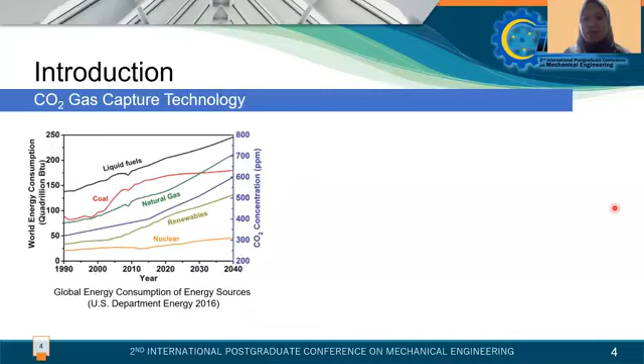So why do we do this topic? Because as we all know, today world energy consumption has increased each year. And based on the US Department of Energy in 2016, the major energy sources still come from fossil fuel. So it has an impact on the increase of the CO2 concentration in the atmosphere.

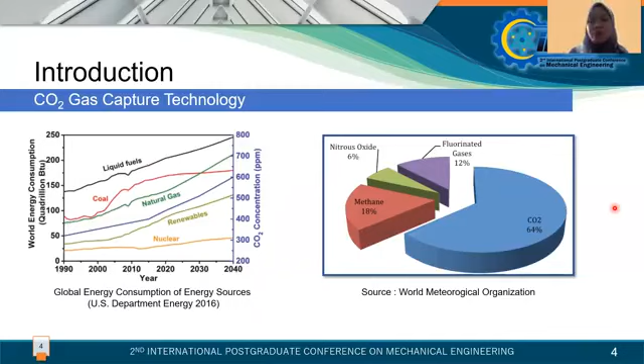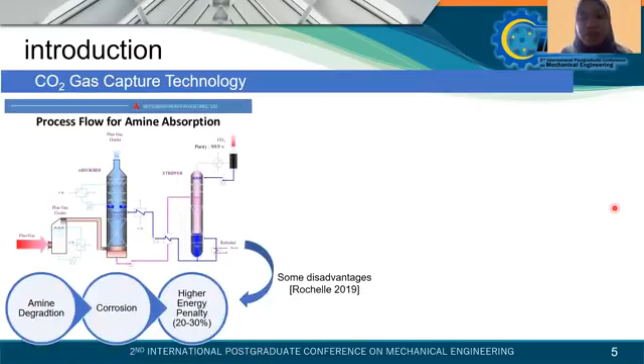And also CO2 and methane are still the biggest contributors to global warming, so we need technology to reduce or capture the CO2 molecule, because renewable energy is considered a long-term plan. Right now, in industry, in power plants and also the cement industry, they use amine absorption to capture CO2. However, this technology has some disadvantages: amine degradation, corrosion, and also a higher energy penalty up to 30%.

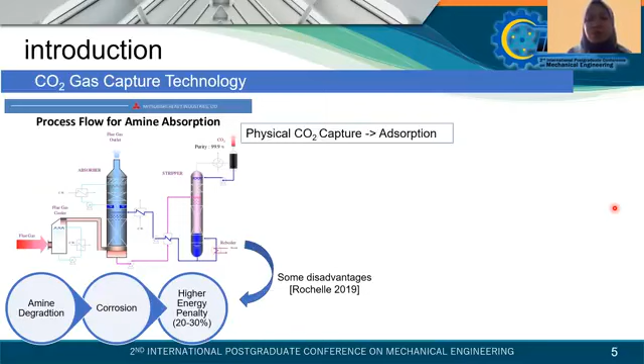So we need another method to capture CO2 with a low energy penalty, and it is called CO2 capture by adsorption. Adsorption is believed to be a viable solution because it has low operational cost, and it doesn't have a high energy penalty. It is divided into two types, PSA and TSA, or temperature swing adsorption.

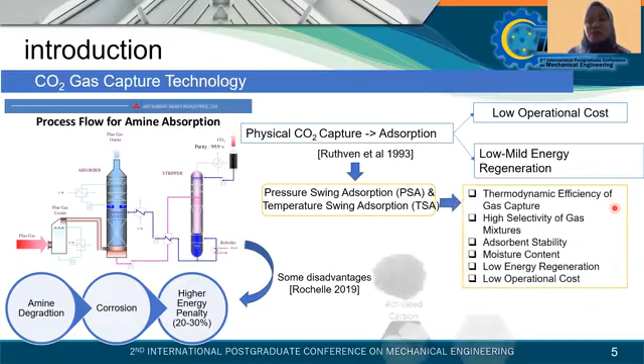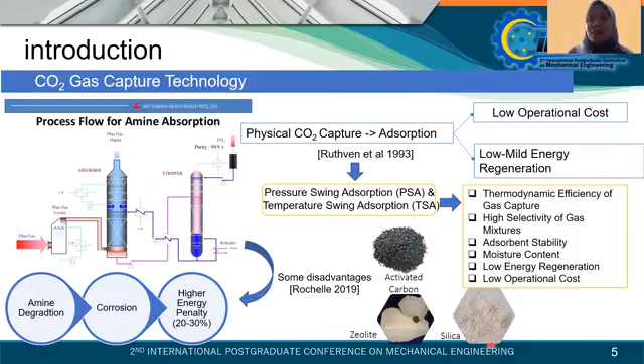The adsorbent should have certain characteristics so that it can capture the CO2 molecule efficiently. Here are the characteristics. And some adsorbents have been widely used in industry, like activated carbon, zeolite, silica gel, aluminum oxide, metal oxide, and also metal organic frameworks.

In the past 2 decades, the new adsorbent called metal organic frameworks, or MOF, is believed to be a viable solution for CO2 adsorption because it has many advantages. They have high porosity and surface area, the pore size is very easily customized, it has good crystallinity, and it has high thermal stability and also chemical stability.

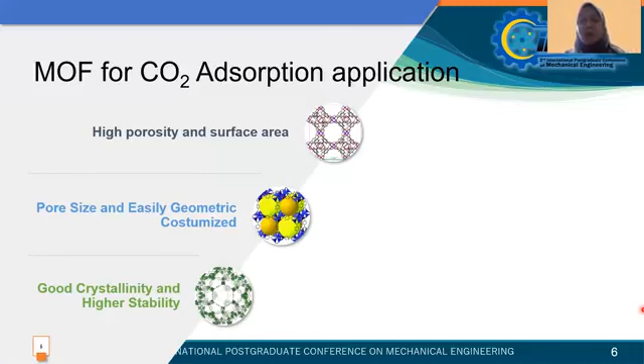Well, MIL-101 is one of the most widely researched today because it has very good thermal stability. It can be heated for 7 days at 100 degrees Celsius. And this kind of MOF has been proven to capture CO2 efficiently. MIL-101 consists of chromium as the metal and terephthalic acid, or 1,4-benzene dicarboxylic acid, as the ligand.

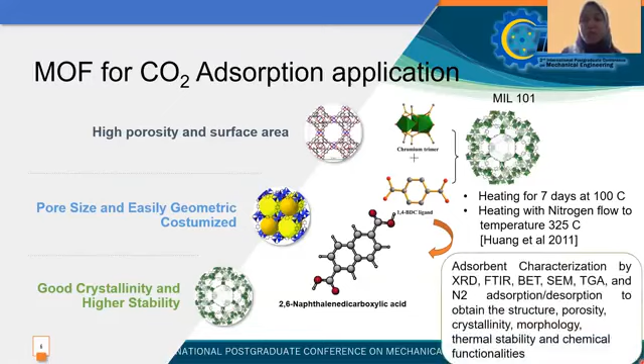Because MOF geometry is very easily customized, we would like to utilize this advantage by changing the ligand. We do ligand functionalization by changing the 1,4-BDC ligand to the 2,6-NDC ligand. As you can see the difference between these ligands, with the double benzene ring, we hope that more CO2 molecules will be captured, because the new MOF, MIL-101 NDC, has high surface area and pore volume. After the synthesis of MIL-101 NDC, we do adsorbent characterization by several techniques.

And here is our methodology. After we prepare the tools and materials, we do the synthesis of MOF. This is the hardest part because we have to investigate the best reaction temperature, reaction time, the best solvent, and also the best molar ratio.

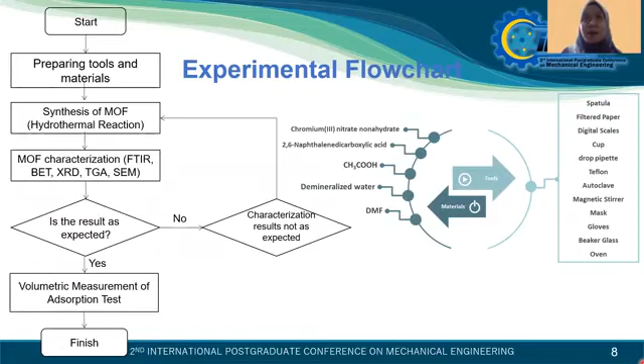And here are the steps of our synthesis procedure. After we stir the mixture using a magnetic stirrer, we put it into the Teflon, and after that we do a heating process in the oven, and we do centrifugation to separate the solid and liquid.

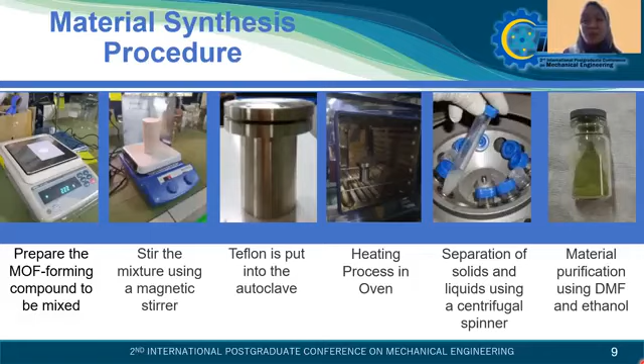And after that, this is the hardest part too. It is called the material purification. We do the second step purification by using DMF and ethanol to remove the unreacted substances in the pore of the MIL-101 NDC. So here is the adsorbent characterization, because each MOF has a different characterization technique.

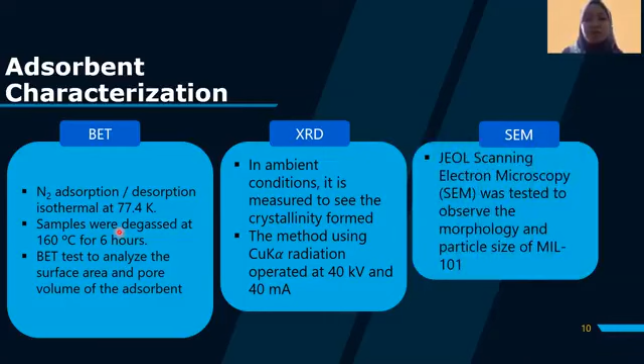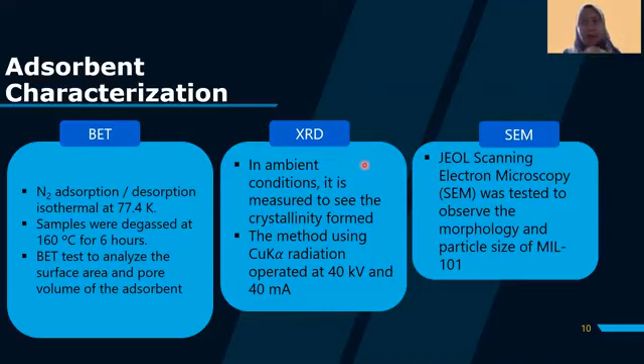So with MIL-101 NDC, to measure the BET, we have to degas at about 160 degrees Celsius for 6 hours to analyze the surface area and the pore volume. And we also observe the XRD and also SEM, and also we want to observe the thermal stability of the MIL-101 NDC, and after that we observe the chemical functionalities of the MOF. And here are the results of our research.

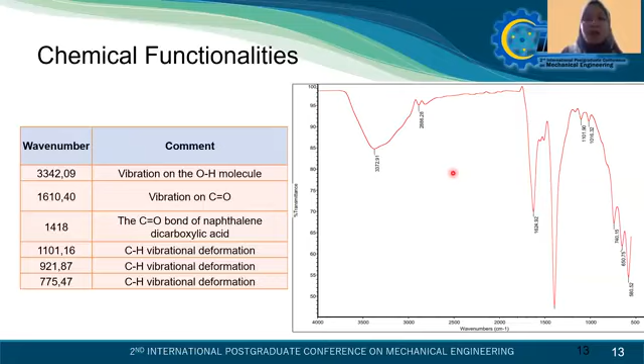And next, here are the results of the FTIR to observe the chemical functionalities. Here we want to observe, is it correct that our MOF contains the naphthalene dicarboxylic acid? As you can see, here are the wave numbers that prove that this MOF has been successfully synthesized.

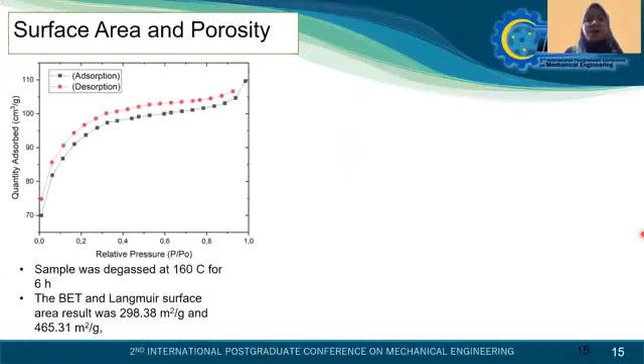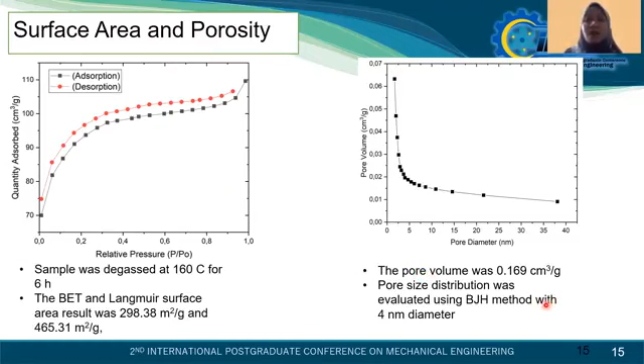And after that, we want to observe the surface area and the porosity, and the surface areas that we got from the BET and Langmuir are 298 square meters per gram and 465 square meters per gram. And also we do the pore size distribution by using the BJH method, and it gets a 4 nanometer diameter for the MIL-101 NDC.

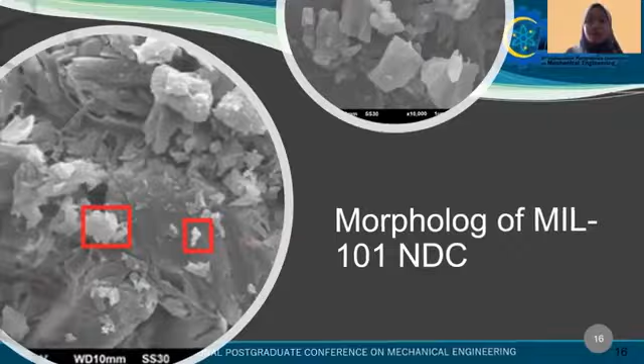And after that, we want to observe the morphology of MIL-101 NDC. As you can see, here is the morphology of our MOF. You can see there is a fractured site in the pore of the MOF. So it means that there are still unreacted substances in the pore of the MOF. So the purification step of our MOF should be increased because there are still unreacted substances contained in the pore of the MOF.

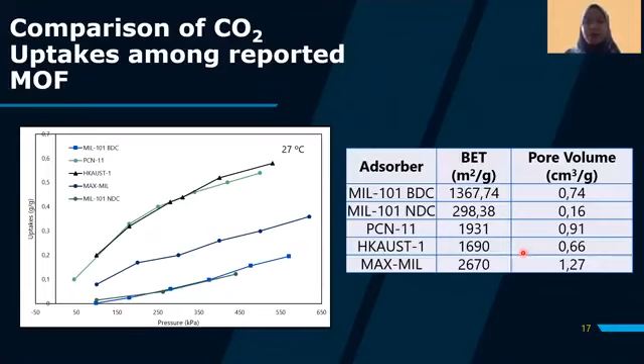So after that, we do the investigation of the CO2 adsorption. We do the comparison among other reported MOFs like MIL-101 BDC, PCN-11, and also MAX-MIL and HKUST-1. And here is our MOF, MIL-101 NDC. As you can see, the CO2 uptake of MIL-101 NDC is still less than the parent MIL-101 BDC. So that's why we need to optimize the synthesis reaction to get a better surface area and a better pore volume to get a higher CO2 capture.

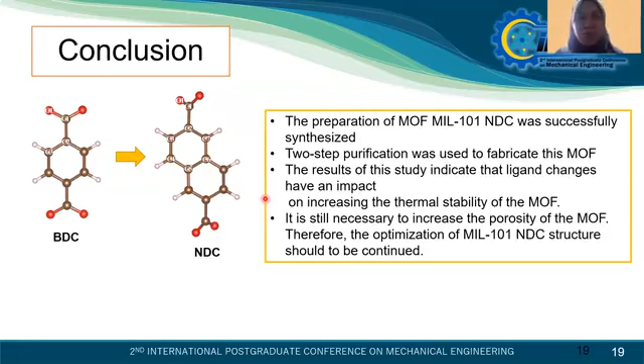But it still needs to increase the porosity of the MOF because the pore volume and also the surface area are still less than the parent. So the optimization should be continued.